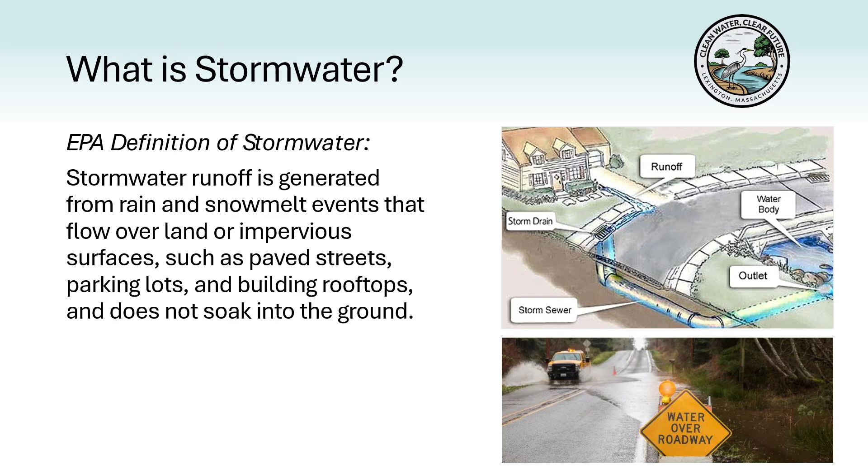Stormwater runoff is generated from rain and snowmelt events that flow over land or impervious surfaces such as paved streets, parking lots, and building rooftops, and does not soak into the ground. So how does stormwater transport pollutants? Stormwater that cannot soak into the ground becomes runoff. Unlike natural areas like forests and meadows, impervious surfaces prevent infiltration. As stormwater flows across these surfaces, it picks up pollutants, transporting them to storm drains, drainage ditches, or other methods of conveyance, eventually reaching receiving water bodies such as streams, rivers, and lakes.

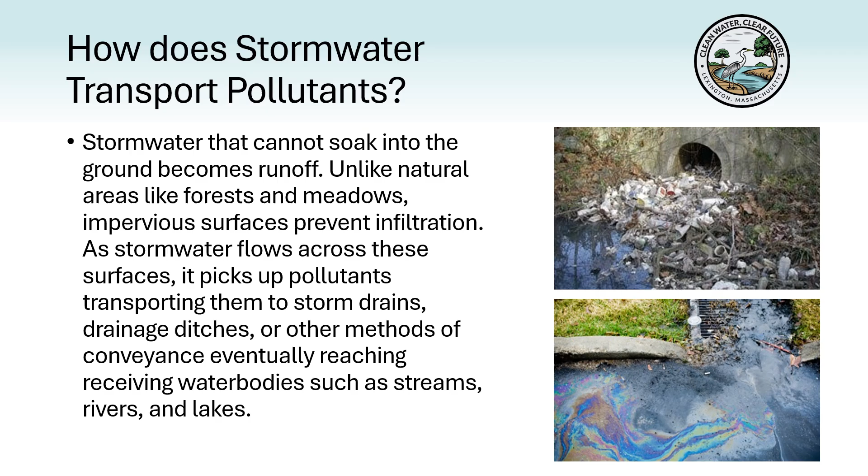Lexington's stormwater system collects, conveys, and sometimes treats stormwater runoff with catch basins, manholes, swales, drainage pipes and culverts, and stormwater control measures. Lexington's stormwater system is separate from the sanitary sewer collection system, and it is important to note that it does not go to a treatment plant. Our system is comprised of 5,912 catch basins, 2,311 manholes, 136 culverts, 136 miles of pipe, and 388 outfalls.

We will be discussing outfalls throughout the presentation and wanted to be sure you all know what those are. They are essentially the exit point where stormwater leaves the formalized drainage network and daylights into a receiving water body.

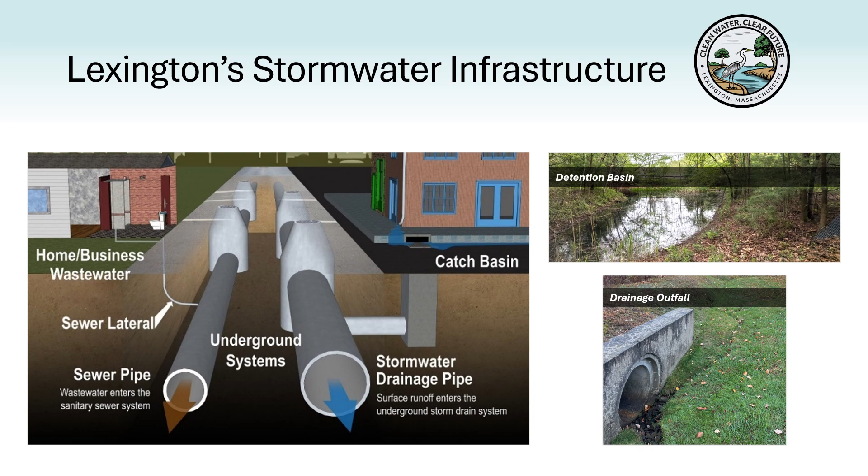Flooding and climate, aging infrastructure, regulatory needs, clean water goals, and land use are the main reasons stormwater management matters in Lexington. We're experiencing more intense rainfall and flooding, while much of our stormwater infrastructure is aging and wasn't designed for today's conditions. We also have regulatory requirements, clean water goals, and volume and rate regulations that help protect our streams, ponds, and neighborhoods. Finally, land use and development affect how stormwater moves through town, increasing the need for proactive planning and maintenance.

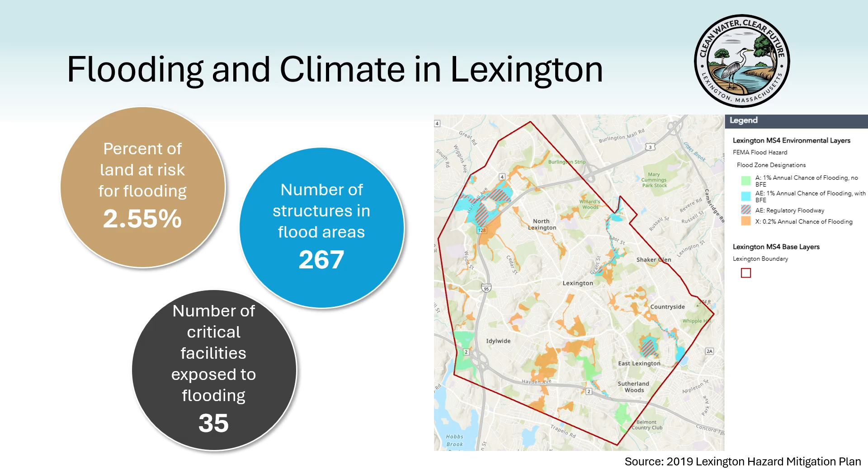Flooding is already a real issue in Lexington. About 2.5% of the town's land area is at risk for flooding, affecting over 260 structures and 35 critical facilities per the 2019 Hazard Mitigation Plan, which is currently in the process of being updated. As rainfall becomes more intense with climate change, these risks are expected to increase, which is why proactive stormwater management is so important.

Much of Lexington's stormwater infrastructure is aging and in many cases was built decades ago. Pipes, culverts, and catch basins can deteriorate, clog, or fail over time if they are not regularly inspected and maintained. Ongoing operation and maintenance help these systems function as intended, reduces flooding and roadway damage, and allows the town to address small issues before they turn into costly emergency repairs.

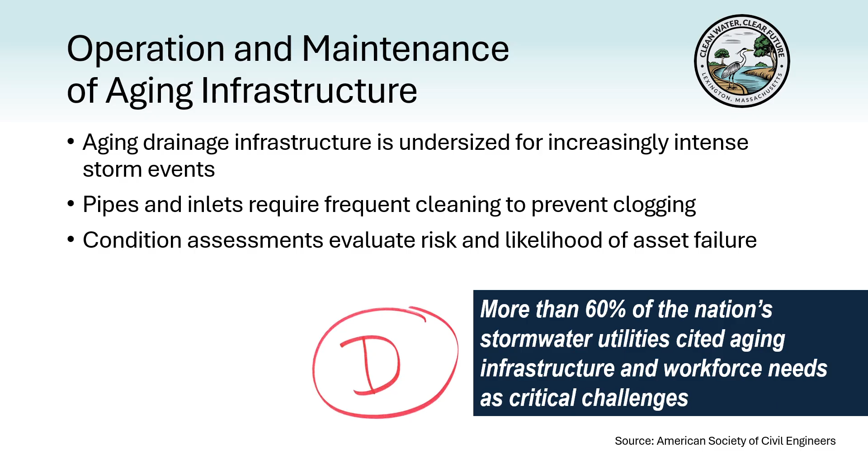Stormwater is regulated under the Federal Clean Water Act because rain and snowmelt can pick up pollutants as they flow across streets, lawns, and construction sites before entering our streams and ponds. The EPA regulates stormwater discharges from municipal storm sewer systems like Lexington's, as well as from construction and industrial activities. These requirements help ensure that stormwater management protects water quality, public health, and the clean waterways our community values.

We are currently in year 8 of the most recently issued MS4 permit. A draft of an updated permit has been developed and commented on, but has not yet been issued.

Land use plays a major role in how stormwater moves through Lexington. Over time, development has increased the amount of impervious surfaces like roads, roofs, and parking lots, which prevent rain from soaking into the ground. As a result, more stormwater runs off into the street, storm drains, and waterways, increasing flood risk and putting added strain on our stormwater infrastructure. Comparing Lexington in 1969 to today shows significant changes in land use. This directly affects stormwater management needs in both water quantity and water quality. How we build affects how water flows.

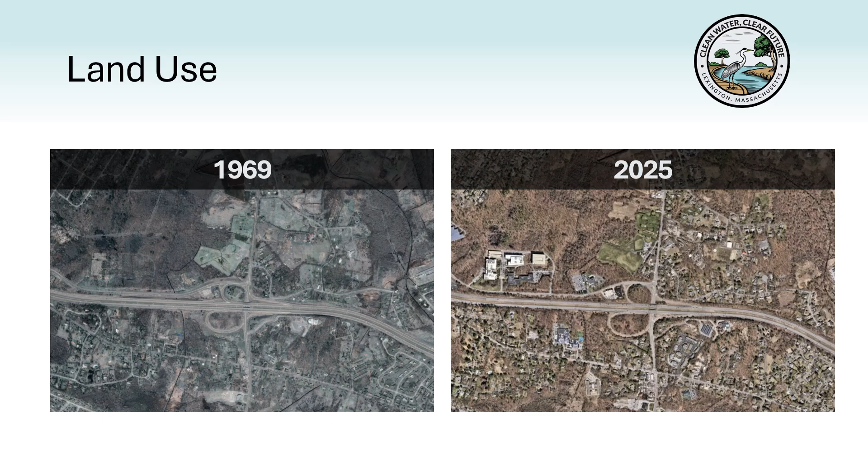Effective stormwater management keeps our community safe, healthy, and resilient. It protects residents and ensures emergency vehicles can navigate during storms, preserves the town's roads, culverts, and drainage systems to avoid costly repairs, and safeguards streams, ponds, and wildlife from pollution. By proactively managing stormwater, Lexington meets regulatory requirements, supports long-term infrastructure planning, and protects property values while controlling costs for taxpayers. Investing in stormwater is an investment in the safety, environment, and future of our town.

Lexington is committed to protecting both human and environmental health. Proper stormwater management keeps our neighborhoods safe by reducing flooding and preventing exposure to pollutants in our streams and ponds. At the same time, it protects our natural areas, wetlands, ponds, and streams by keeping water clean and supporting healthy wildlife. This work ensures that our outdoor spaces are safe and enjoyable for everyone, while also preventing costly damage and long-term risks to our community. In short, a healthy environment here in Lexington means a healthier, safer town for all of us.

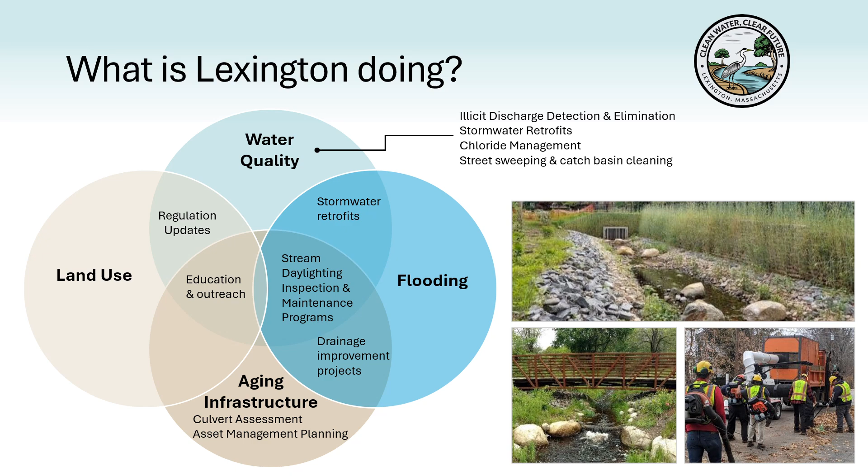So how is Lexington addressing the challenges of water quality, flooding, aging infrastructure, and land use? This diagram highlights the key areas where the town's efforts overlap. You can see overlap in numerous areas. For example, when working through a flooding problem, there are commonly opportunities to improve water quality and replace aging infrastructure. Over the next few slides, we'll walk through what Lexington is doing today and how these actions work together.

This project in the Oxbow and Constitution neighborhood is a great example of green infrastructure in action. This area experienced frequent flooding that affected both roadways and nearby homes, largely because an old, undersized drainage pipe could no longer handle heavy rain events. Rather than replacing it with a larger underground pipe, Lexington chose a nature-based solution. The town daylighted the stream and restored adjacent wetlands, allowing stormwater to slow down, spread out, and absorb naturally. This project was identified as a priority through town-wide stormwater planning and reflects Lexington's commitment to sustainable infrastructure and climate resilience.

You'll also notice the vegetated retaining wall, vegetated with live willow branches that root and develop into the wall. This provides the necessary structural support while blending it into the landscape. Over time, the vegetation helps stabilize the slope, reduce erosion, and improve stormwater absorption, making it a more environmentally friendly alternative to traditional hard infrastructure.

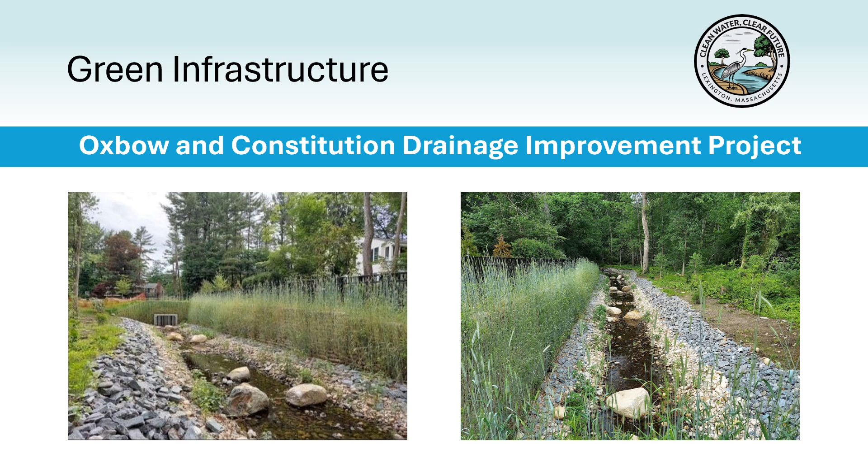Infiltration trenches are a type of stormwater retrofit that helps manage runoff right where it falls. They're made up of a perforated pipe surrounded by stone, which collects stormwater and allows it to soak into the ground through highly permeable soils. As water moves through the trench, pollutants picked up from roads and other paved surfaces are filtered out by the soil. Instead of being carried through pipes and discharged directly into nearby streams, the water is absorbed naturally.

So far, Lexington has installed 25 infiltration trenches in the Mystic River watershed and 4 in the Charles River watershed, helping reduce flooding and improve water quality across town. These trenches are also very efficient at removing phosphorus, and we often install these in advance of paving a roadway to increase our phosphorus removal in an area. To date, we have several dozen of these installed throughout the town.

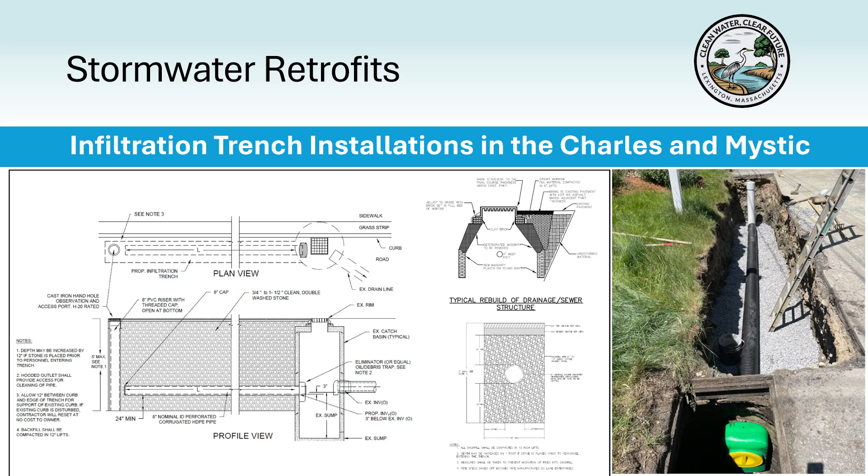Lexington owns and maintains more than 100 culverts that carry streams and stormwater under roads. When these structures fail, they can cause flooding, road closures, and costly emergency repairs, so keeping them in good condition is critical for public safety. To stay ahead of these issues, the town assessed its culverts and developed an asset management plan to identify which ones need attention first. This is done using a risk of failure versus cost of failure analysis.

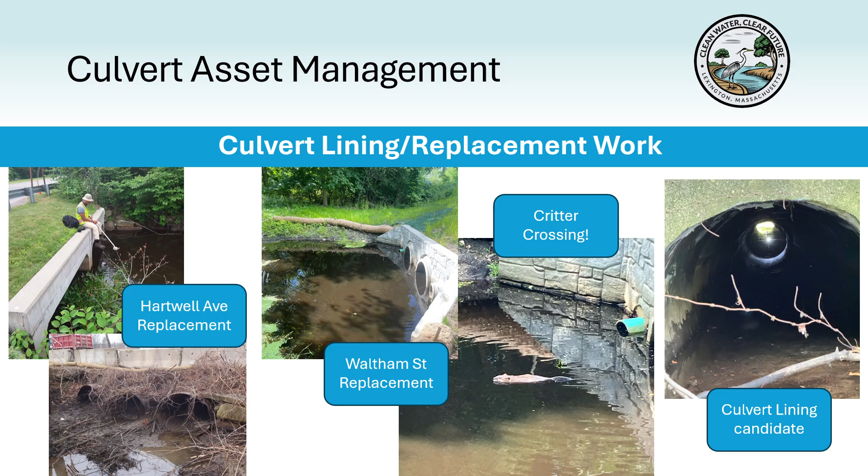One of those prioritized is a culvert beneath Grove Street, a busy roadway near I-95. While it's still functioning, a failure would have major impacts on traffic and access. Instead of fully replacing the culvert, which would mean long road closures, the town is lining the existing pipe. This approach extends the life of the culvert, costs significantly less, and minimizes disruption to residents. Construction will begin later this season. We also replace culverts when needed, and several have been replaced over the last 15 years. Replacements include improvements in openness, natural bottoms, and increasing of the bankfull width.

Illicit discharges are anything entering the stormwater system that isn't rainwater. That can include things like chemicals, wastewater, or trash, and these materials can end up flowing directly into our streams and ponds untreated. To prevent this, Lexington runs an Illicit Discharge Detection and Elimination, or IDDE, program. During dry and wet weather, the town inspects stormwater outfalls to make sure only clean water is flowing through the system. Dry weather inspections are important because they help identify pollution sources that shouldn't be there.

Much of this work is done with the help of our college and summer interns through the Stream Team program. These students conduct field inspections, gain hands-on experience, and play a key role in protecting local water quality. The program has even been recognized with a Stormy Award for its success. When we find an illicit discharge, then the detection piece comes into play. The key tools for detection are dye testing and CCTV.

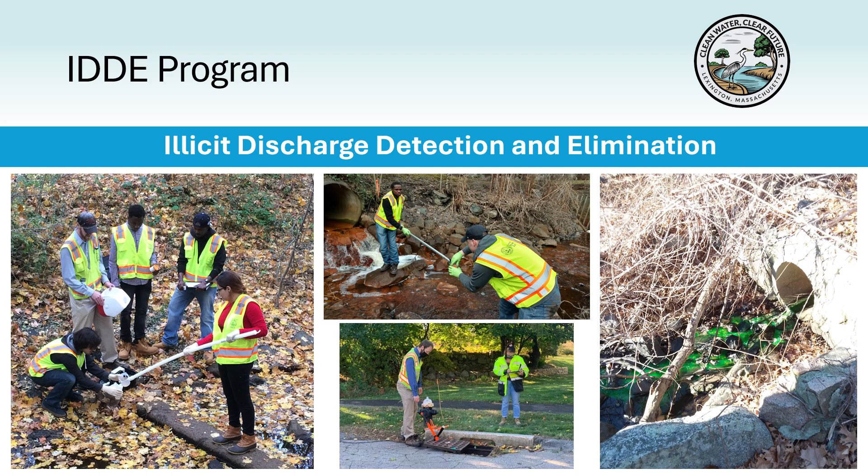For a dye test, the dye is dropped in an upstream point, which could be a manhole or an internal fixture like a toilet or a sink. Once dropped, observations are done for the dye, and if it shows up in the stormwater network, we then know we have an illicit and found the source that needs to be eliminated. CCTV within the drain lines can also help to pinpoint illicits, and we utilize both those tools. To date, we have found and removed 13 illicit discharges.

Not all stormwater solutions involve construction. Lexington also relies on non-structural controls like street sweeping and catch basin maintenance to keep water flowing and pollutants out of our waterways. These are referred to as best management practices, or BMPs. Street sweeping helps remove leaves, sediment, and debris that can clog storm drains and contribute to flooding and water quality issues. The town sweeps all streets once in the spring and twice in the fall, with main roads swept regularly during the summer and downtown areas receiving more frequent attention. This work is done using specialized street sweepers designed to pick up fine material that would otherwise wash into streams.

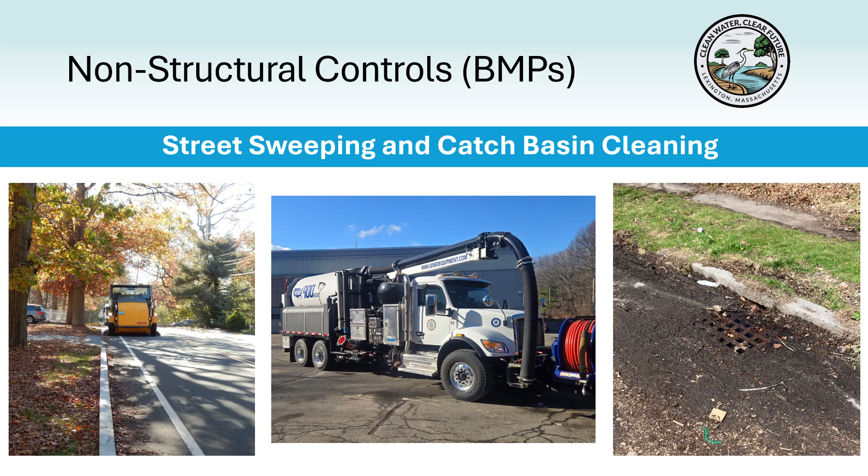Lexington also maintains approximately 5,900 catch basins across the road network. Crews use specialized equipment, including Vactor jet trucks, to inspect and clean catch basins and will clean some locations more frequently if they collect a lot of debris. The goal is to keep catch basins functioning properly by preventing them from becoming too full. The target is no greater than 50% full. Because this work is labor intensive and staffing is limited, resident involvement makes a big difference. Residents are encouraged to clear debris from catch basins near their homes, especially after storms or snow melt. The town also offers an Adopt a Drain program where volunteers help monitor and clear storm drains. This community effort helps extend the impact of our maintenance work, and we'll talk more about that program shortly.

Salt and chloride are important for winter safety, but they're also pollutants of concern. When snow and ice melt, salt can wash into storm drains, streams, and reservoirs. Elevated chloride levels can harm aquatic life and impact water quality, including drinking water sources. Some communities that are not influenced by the ocean are experiencing brackish waters and saltwater plant life due to the excessive salt use. Lexington's DPW works to reduce chloride use while still keeping roads safe. The town uses enhanced brine application systems that apply liquid brine more efficiently to the pavement. This improves effectiveness and allows crews to use less salt overall. Lexington also carefully tracks where and how much material is applied, reviews plowing routes each year, and reports these efforts through the town's stormwater program. Salt and de-icing materials are also stored away from storm drains to prevent spills and reaching waterways.

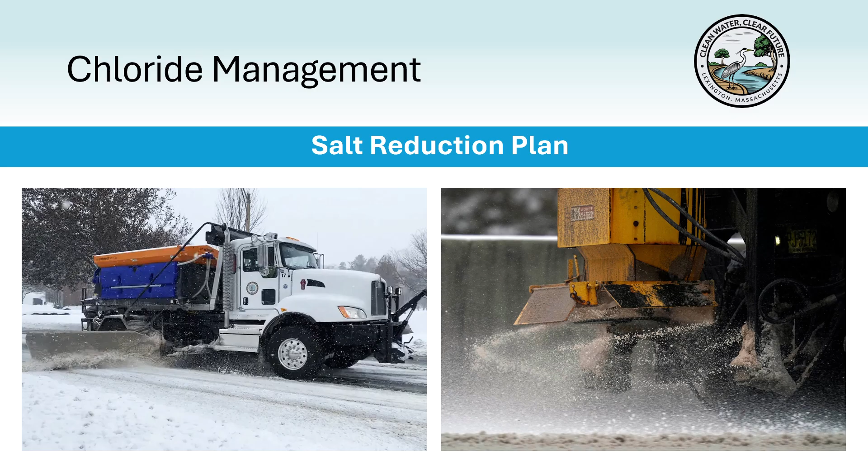Residents play an important role as well. Shoveling early helps reduce the amount of salt needed. Using salt sparingly on driveways and sidewalks makes a difference, and keeping snow piles away from storm drains helps prevent concentrated chloride runoff. Together, these actions help protect water quality while keeping the community safe in the winter.

Education and outreach are a key part of Lexington's stormwater program. Protecting water quality isn't something the town can do alone. It works best when residents, businesses, and community groups are involved and informed. The town shares information through brochures, fact sheets, and online resources about everyday actions that affect stormwater, like pet waste, lawn care, chloride use, and proper snow and ice practices. These materials help residents understand how small choices can make a big difference. Programs like Adopt a Drain give residents a hands-on way to help by clearing debris from storm drains before it reaches local waterways. This directly supports water quality and helps meet stormwater permit requirements.

Lexington also hosts workshops and community events, including DPW Day and outreach at the farmers market, where staff share information, demonstrate stormwater practices, and engage residents of all ages. We even bring out hands-on tools like a small-scale infiltration trench model to make these concepts easier to understand. Finally, the town's website and social media provide easy access to stormwater information, maps, and reporting tools, making it simple for residents to stay informed and get involved.

Lexington will need to keep finding and implementing ways to reduce phosphorus in stormwater runoff. This includes funding and constructing structural stormwater control measures, as well as enhancing non-structural controls, such as street sweeping, leaf litter collection, and catch basin cleaning. We'll also focus on removing or disconnecting existing impervious surfaces where possible. Ongoing inspection, maintenance, and replacement of aging infrastructure will remain a priority. We'll continue tracking the operation and maintenance of both public and private SCMs and provide residents with education and outreach materials to encourage community involvement. All of these efforts support our long-term goal, meeting the nutrient reduction targets required by the EPA.